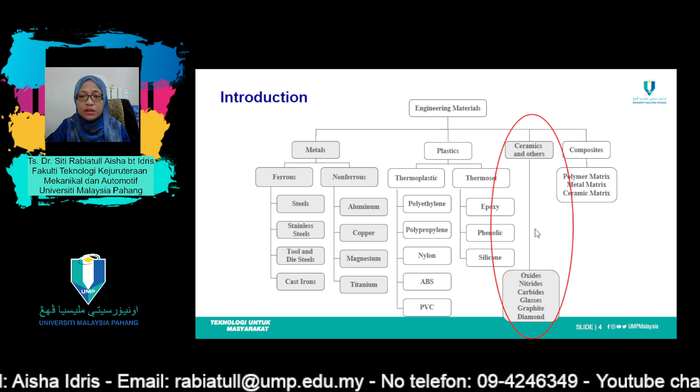In this subject, engineering materials, these are the topics that we have covered. So today we are going to look at ceramics and others, which includes ceramic and glass.

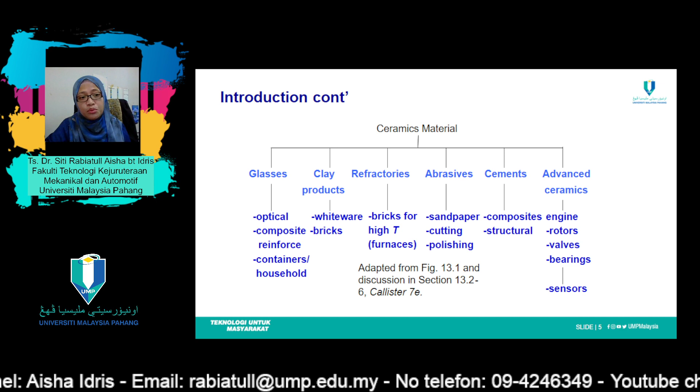Let's move on to ceramics. Most ceramics are compounds between metallic and non-metallic elements, for which the interatomic bonds are either totally ionic or predominantly ionic but having some covalent character. The term ceramic comes from the Greek word keramikos, meaning burnt stuff, indicating that the desirable properties of these materials are normally achieved through a high temperature heat treatment process called firing.

Up until the past 60 or so years, the most important materials in this class were termed the traditional ceramics—those for which the primary raw material is clay. Products considered traditional ceramics include china, porcelain, bricks, tiles, and in addition, glasses and high temperature ceramics.

Of late, significant progress has been made in understanding the fundamental character of these materials and the phenomena that occur in them responsible for their unique properties. Consequently, a new generation of these materials has evolved, and the term ceramic has taken on a much broader meaning. To one degree or another, these new materials have a rather dramatic effect on our lives—electronics, computers, communication, aerospace, and a host of other industries rely on their application or use.

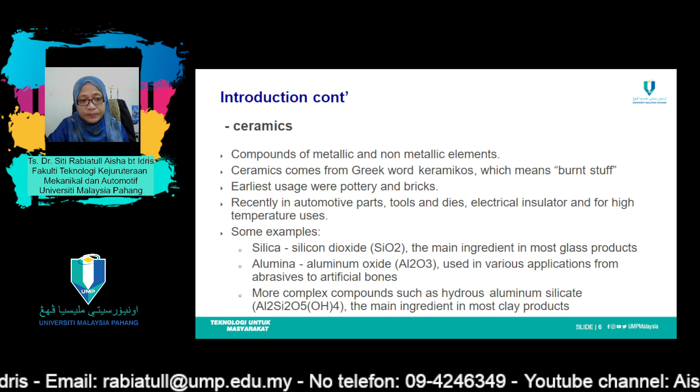These are other examples of ceramic products which you may find in the market.

In terms of ceramic properties, ceramics have medium density, high mechanical strength, low ductility, and very good high temperature stability as compared to other materials like metals, plastics, as well as composites.

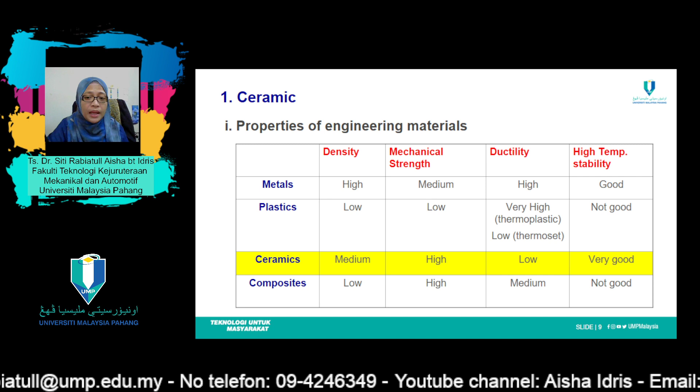There are various types of ceramics. Traditional ceramics, whose products include pottery, bricks, abrasives, and cement. Second is new ceramics—a newer invention being developed based on oxides, carbides, and so on, having superior mechanical or physical properties as compared to traditional ceramics.

The third one is glass, which is based on silica and distinguished by its non-crystalline structure. In addition, there's also glass ceramic under this category, whereby this type of glass is transformed into a largely crystalline structure by heat treatment.

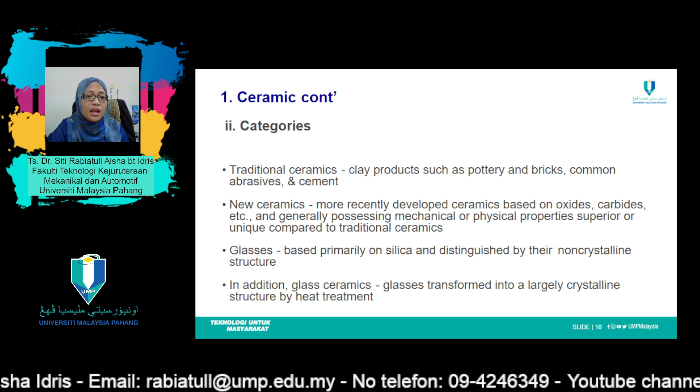Other than that, as mentioned, other products for ceramics include clay construction products such as bricks, clay pipe, and building tile. For refractory ceramics—ceramics capable of high temperature applications—such as furnace walls, crucibles, and molds. Number 3 is cement used in concrete, normally used for construction and roads.

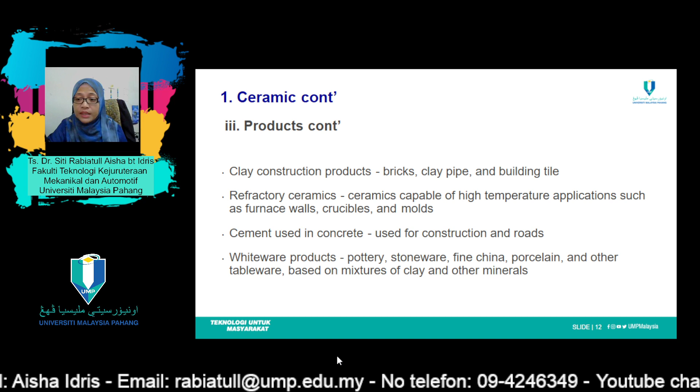Other than that, whiteware products such as pottery, stoneware, fine china, porcelain, and other tableware based on mixtures of clay and other minerals.

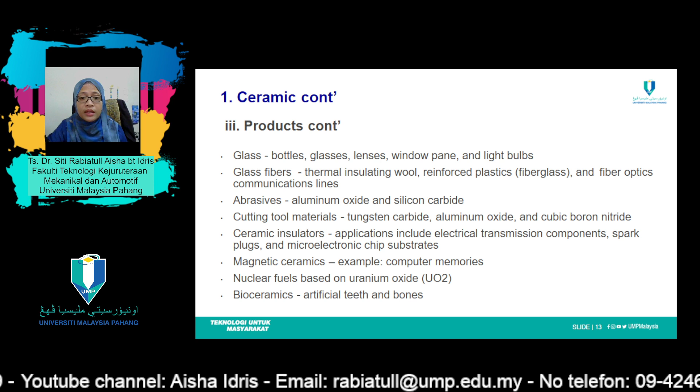Other than that, bottle glass, fiberglass, abrasives, cutting tool materials, ceramic insulators, magnetic ceramics, nuclear fuels based on uranium oxide, and bioceramics like artificial teeth and bones.

Because ceramics are composed of at least two elements, and often more, their crystal structures are generally more complex than those for metals. The atomic bonding in these materials ranges from purely ionic to totally covalent. Many ceramics exhibit a combination of these two bonding types, the degree of ionic character being dependent on the electronegativities of the atoms itself.

Ceramics have superior hardness.

Ceramic has superior hardness, thermal and electrical resistance compared to metals. They are available in single crystal and polycrystalline forms. Grain size has a major influence on the strength and properties of ceramic. Finer the grain size, the higher the strength and toughness of that ceramic.

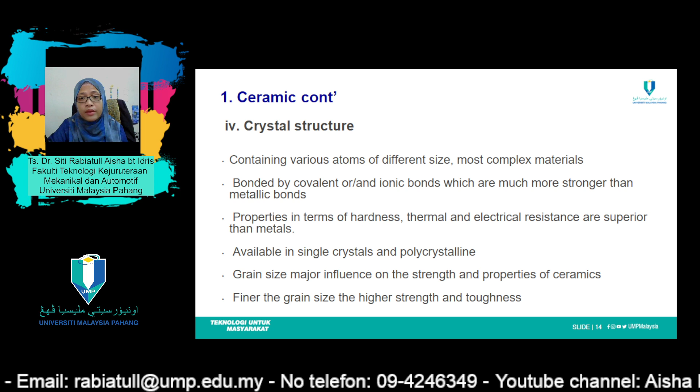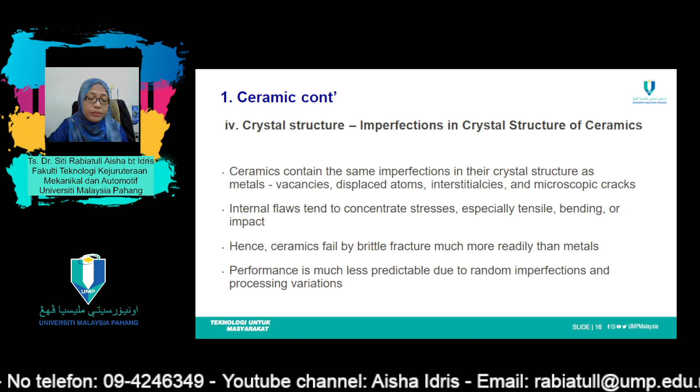Ceramic also has its own imperfections, for example vacancies, displaced atoms, interstitialcies, and microscopic cracks. So in ceramic, there are internal flaws which tend to concentrate stress, especially tensile, bending, or impact. Due to that, ceramic will fail by brittle fracture. So overall, the performance of ceramic is unpredictable due to its random imperfections and processing variations.

Traditional ceramics refer to ceramic materials derived from common, naturally occurring raw materials such as clay materials and quartz sands. Through industrial processes practiced for some centuries, these materials are made into familiar products such as china tableware, clay brick and tile, industrial abrasives, refractory linings, and Portland cement. Traditional ceramic objects are almost as old as the human race.

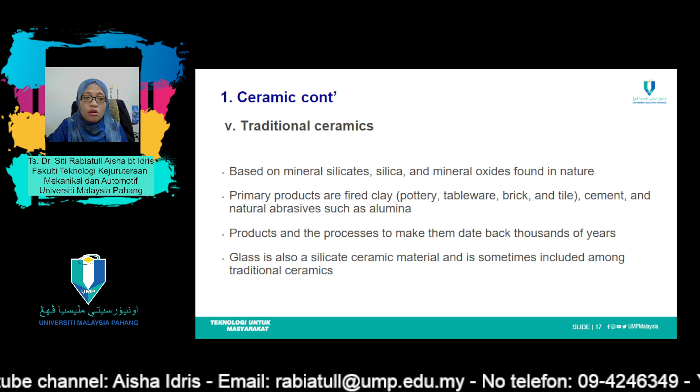Naturally occurring abrasives were used to sharpen primitive wood and stone tools, and fragments of useful clay vessels have been found dating from the Neolithic period, some 10,000 years ago. Not long after the first crude clay vessels were made, people learned how to make them stronger, harder, and less permeable to fluids by burning.

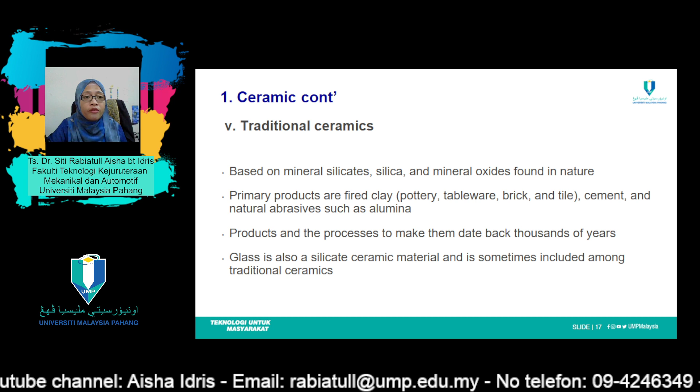These advances were followed by structural clay products, including brick and tile. Clay-based bricks strengthened and toughened with fibers such as straw were among the earliest composite materials. Artistic uses of pottery also achieved a high degree of sophistication, especially in China, the Middle East, and the Americas.

Because of the large volumes of product involved, traditional ceramics tend to be manufactured from naturally occurring raw materials. In most cases these materials are silicates, that is, compounds based on silica, SiO2, and the oxide form of the element silicon. In fact, so common is the use of silicate materials that traditional ceramics are often referred to as silicate ceramics, and their manufacture is often called the silicate industry.

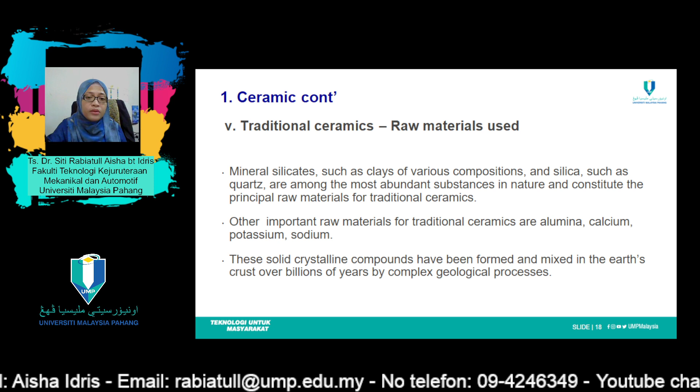Many of the silicate materials are actually unmodified or chemically modified aluminosilicates, although silica is also used in pure form. Altogether, the raw materials employed in traditional ceramics fall into three commonly recognized groups: clay, silica, and feldspar.

Now let's look at glass. Glass is an inorganic solid material that is usually transparent or translucent, as well as hard, brittle, and impervious to the natural elements. Glass has been made into practical and decorative objects since ancient times, and it is still very important in applications as disparate as building construction, housewares, and telecommunications. It is made by cooling molten ingredients such as silica and silica sand with sufficient rapidity to prevent the formation of visible crystals.

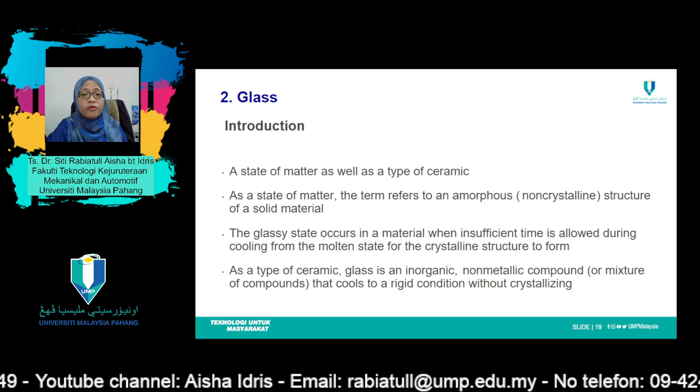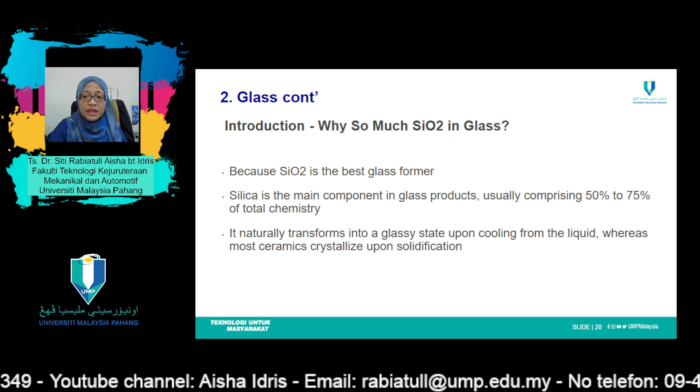Why so much silica in glass? It's because silica is the best glass former, and silica is the main component in glass products. Usually it consists of 50% to 75% of total chemistry, and it naturally transforms into a glassy state upon cooling from the liquid, whereas most ceramics crystallize upon solidification.

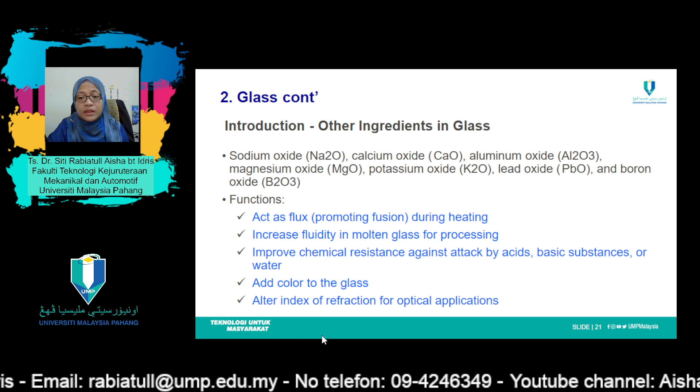Other ingredients in glass include sodium oxide, calcium oxide, aluminum oxide, magnesium oxide, potassium oxide, lead oxide, and boron oxide. Their functions are as follows: act as a flux during heating, increase fluidity in molten glass for processing, improve chemical resistance, add color to the glass, and alter the index of refraction for optical applications. Examples of glass products include window glass, containers, light bulbs, laboratory glassware, fiberglass, optical glasses, and so on and so forth.

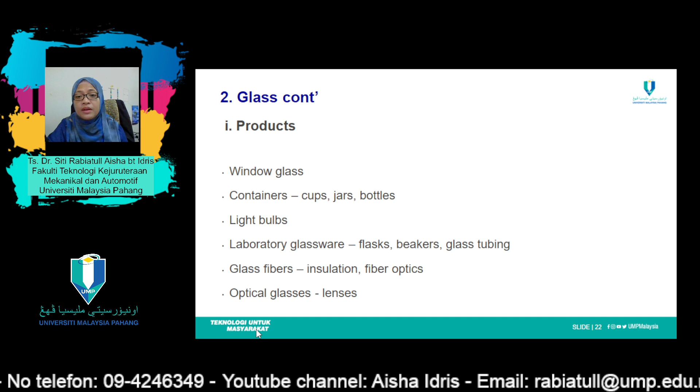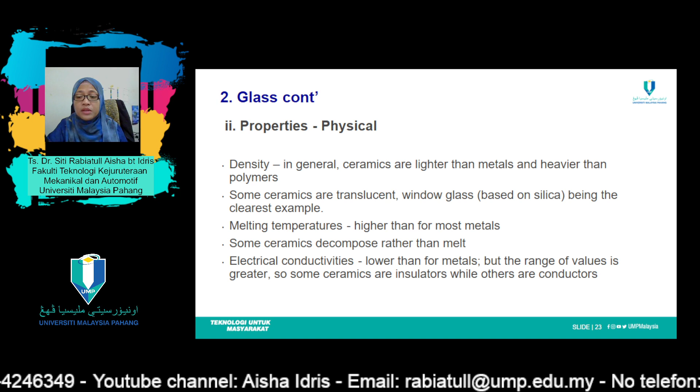As for the physical properties of glass, for example density: in general, ceramics are lighter than metals and heavier than polymers. Some ceramics are translucent, with window glass being the clearest example. Melting temperature is higher than most metals, though some ceramics decompose rather than melt. Electrical conductivity is lower than metal, but the range of values is greater, as some ceramics are insulators while others are conductors.

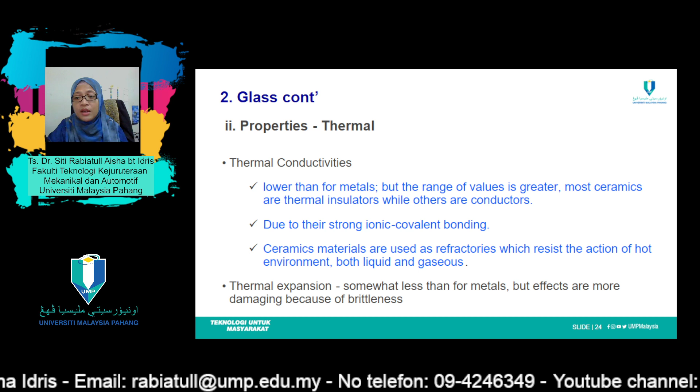As for the thermal properties: number one is thermal conductivity, which is lower compared to metals. Due to their strong ionic-covalent bonding, ceramic materials are used as refractories, which resist the action of hot environments, both liquid and gases. Number two is thermal expansion, somewhat less than metal, but effects are more damaging because of brittleness.

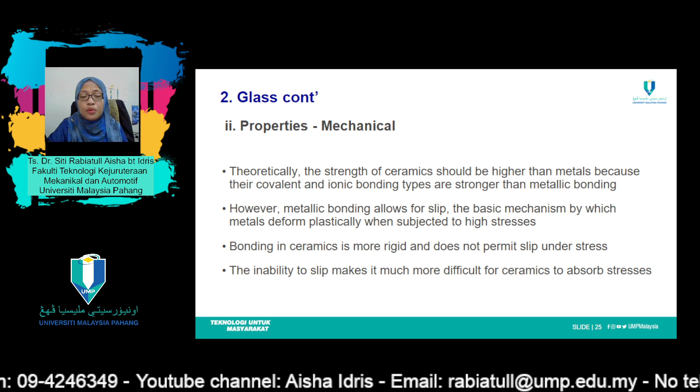As for the mechanical properties of glass: theoretically the strength of ceramics should be higher than metals because their covalent and ionic bonding types are stronger than metallic bonding. However, metallic bonding allows for slip, the basic mechanism by which metals deform plastically when subjected to higher stresses. Bonding in ceramic is more rigid and does not permit slip under stress, that's why we call it brittle. The inability to slip makes it more difficult for ceramic to absorb stresses, so that's why we call it brittle.

So I think that will be all for today's topic, and we are already finished with chapter 8.